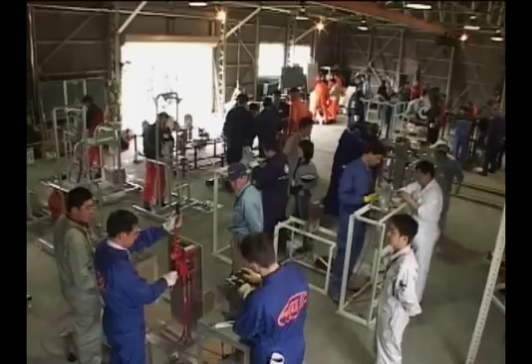Typical causes of accidents include improper resetting of the lifeboat release device, inadvertent operation of the release handle, and cable rod malfunction. Following a spate of incidents, the SOLAS Convention was revised, and as of July 2006, annual inspections, servicing and repair are to be conducted by the manufacturer's representative or a person trained and certified by the manufacturer.

In this DVD program, you will be shown operation and maintenance fundamentals for various types of life-saving appliances, with a focus on accident prevention. The guidelines introduced are general in nature. For a specific model or product, users are strongly advised to refer to the instruction manual provided by each manufacturer.

Standards, specifications and functions applying to lifeboats are strictly regulated by the SOLAS Convention. Lifeboats covered by the 83 amendments include partially enclosed lifeboats, totally enclosed lifeboats, and totally enclosed fire-protected lifeboats that are equipped with water spray systems and air supply devices.

Most lifeboats used on modern general merchant ships are of a totally enclosed design, i.e. they are covered with a canopy and have a propulsion engine. As for passenger ships, partially enclosed lifeboats are the most common. Ships with highly flammable cargo or handling toxic materials carry fire-protected lifeboats.

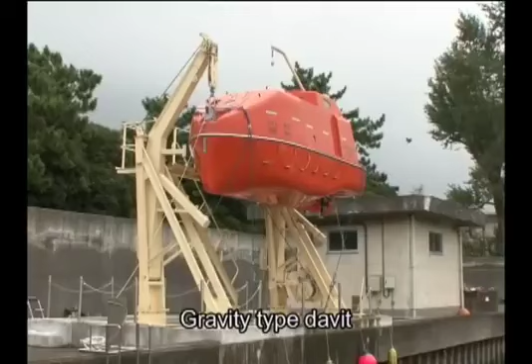All lifeboats have both offload and onload release functions, and simultaneous release of both ends is possible. Following enforcement of the 1996 amendment to the LSA code, all lifeboats are provided with an interlock mechanism to prevent accidental release before the lifeboat is waterborne. Totally enclosed lifeboats are usually launched using gravity-type davits. However, all bulk carriers built after July 2006 are required to have free-fall launching devices.

To provide you with a better understanding of the structure and operations of various kinds of life-saving equipment, on this DVD we will deal with lifeboats, life rafts, rescue boats, life jackets, immersion suits, distress signals, and other accessories.

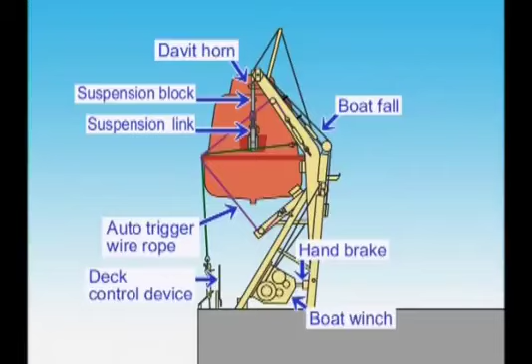Gravity-type davits swing a lifeboat outward and lower it into the water. They consist mainly of a pair of frames, davit arms, a lashing device, boat falls, suspension blocks, and boat winches. The lifeboat is lowered at a constant speed, using its own weight, by operating either the remote control wire inside the lifeboat or the remote control lever on the ship's deck.

Let us take a closer look at lowering and launching operations for totally enclosed lifeboats with gravity-type davits. Prepare a set of transceivers and confirm that communication is possible. Also confirm that the cable for the storage battery charge has been detached. Confirm attachment of the painter to the lifeboat's painter release device. The painter should be connected to the bitt of the parent ship as far forward as practicable.

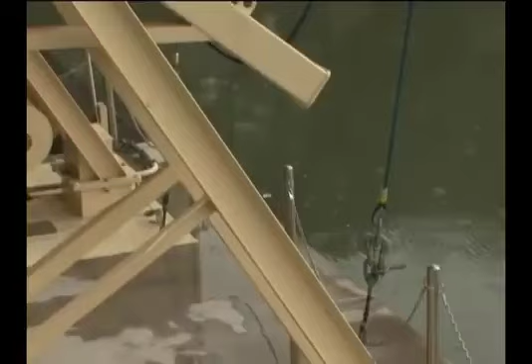Remove the overlashing wire ropes if fitted. Some vessels are not equipped with overlashing wire ropes. Overlashing wire ropes, once removed, should be kept together, but far enough away to prevent entanglement with the lifeboat. Tangling of the rope with the lifeboat could lead to a serious accident. The auto-trigger wire rope comes off automatically when the lifeboat is swung out.

Pull out the safety pin to release the boat winch brake. Pull out the davit arm stop safety pins, both fore and aft, and release the stop by pulling down the handle in one continuous motion. Confirm that the remote control wire has been drawn into the lifeboat. Then open the access hatch and get on board.

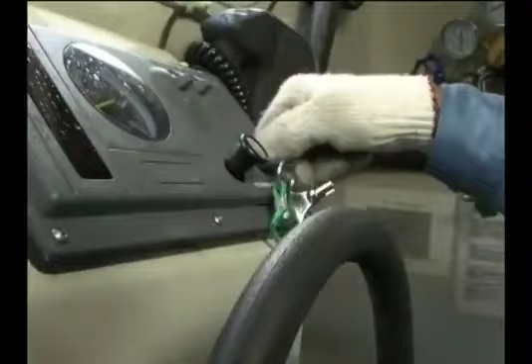Once inside the lifeboat, immediately fit the bottom plug. Open the fuel valve and the cooling seawater valve, and close the drain valve on the exhaust pipe. Then confirm that all crew on board have fastened their seatbelts. The operator starts the engine and pulls down on the remote control wire to swing out the lifeboat.

Once swing out is complete, fully pull down the remote control wire. The lifeboat will descend at a fixed speed using its own weight. As the lifeboat approaches the water's surface, the operator should alert the crew about impending splashdown. Avoid rapid swing-outs or abrupt halts during the swing-out operation, as this can have a dangerous impact on the boat. Inching operation is also dangerous, since it shakes the lifeboat.

Lifeboat swing-out and lowering operation can also be conducted using the operation lever on the deck of the parent ship. There are two types of release for launching a lifeboat. One is the offload release, the standard method of launch and release, and the other is the onload release, which is to be conducted in emergency situations only. When the lifeboat is fully waterborne and there is no load on the release hook, carry out offload release. When the lifeboat is not fully waterborne and there is a load on the hook, onload release shall be performed.

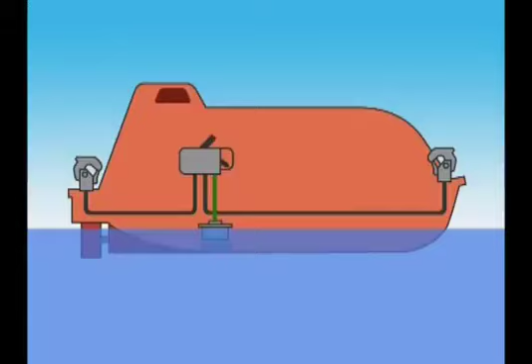The release gear system comprises a pair of release hooks located fore and aft of the boat, a release handle on the side of the steering seat, a pair of control cables, a hydrostatic unit to prevent the lifeboat from plunging due to mishandling, and an interlock cable.

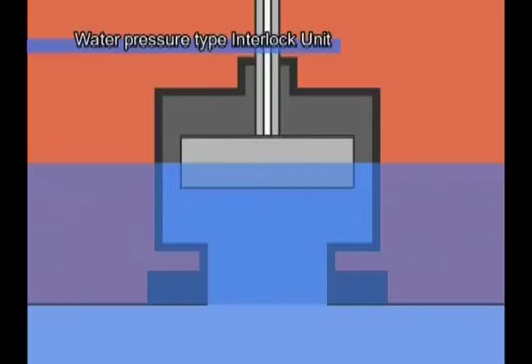There are two types of hydrostatic unit: a direct system that controls detected water pressure directly through an interlock cable, and an electric type that electrically controls the interlock lever with pressure signals to operate the relay and the solenoid. The interlock mechanism, which prevents a mishandled lifeboat from falling before it is fully waterborne, became mandatory for all lifeboats under the SOLAS 96 amendment.

The offload release is an operation conducted when the lifeboat is fully waterborne and there is no load on the release hook. Prior to conducting this operation, the following should be confirmed. No ropes or lines are entangled on the fore and aft release hooks. The lifeboat is fully waterborne. The engine has been started. And finally, all crew are in their seats with their seat belts fastened.

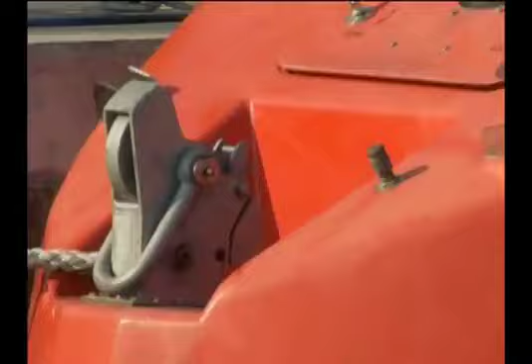After all this has been confirmed, the operator releases the safety lock device, pulls out the release handle safety pin, and pulls the release handle to the fully open position in one continuous action. Some release gear systems do not have a safety lock device. In normal situations, the interlock unit detects the water pressure and releases the interlock when the boat is afloat, so it is possible to carry out an offload release using the release handle. However, in the event that the hooks have not released, it is necessary to conduct an onload release.

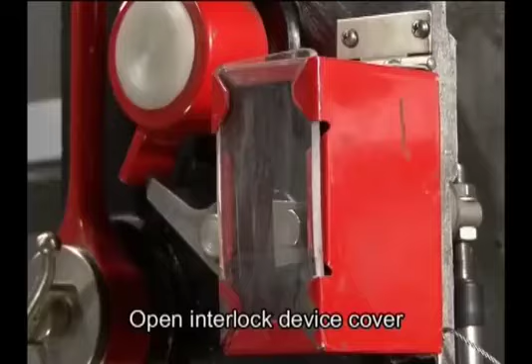The onload release should be reserved for emergency use only, when the hooks are not released due to malfunction of the hydrostatic unit, or when seas are rough and normal offload release is not advisable. To conduct an onload release, first open the cover of the interlock device. Fully raise the hydrostatic interlock lever and while holding it, insert the securing pin to release the interlock.

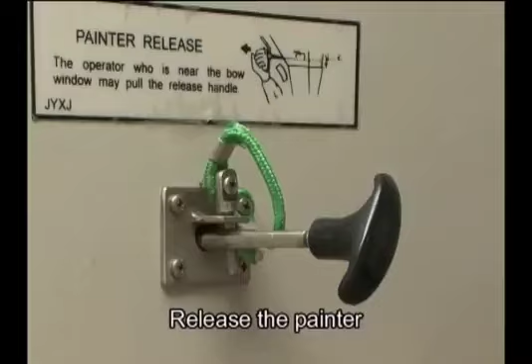Then, release the safety lock device. Next, remove the release handle safety pin and pull the release handle to the fully open position in one continuous action. Some release gear systems do not have a safety lock device. Release the painter and immediately get clear of the ship.

Now let's look at the recovery operation. At least 3 persons are required for this operation. Accidents involving lifeboats often take place during recovery. Of these accidents, 70% are due to improper resetting of the release gear. As such, mastering the proper way to reset the release gear is extremely important. Properly resetting the release hook is an essential part of every recovery operation. Improper resetting may lead to the lifeboat being held by only one hook or even falling, resulting in a fatal accident.

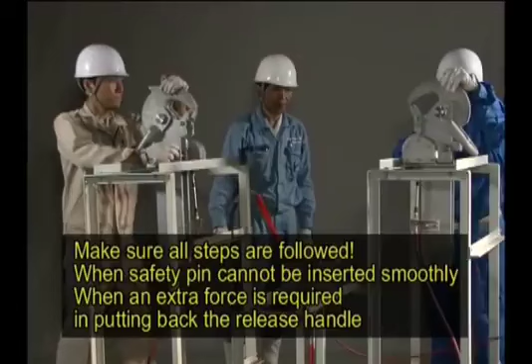There are various types of release hooks. Regardless of type, improper resetting is indicated when the safety pin cannot be smoothly inserted or when extra force is required to return the release handle to the set position. If you have any doubts about the resetting operation, start over and redo each step in the process.

To reset the release hooks, begin by pulling the release handle upward for about 30 degrees. Next, simultaneously lift the fore and aft hooks. After ensuring that the hooks have been reset properly, insert the safety pin. Finally, reset the safety lock device and make sure that it is in the locked position. The safety pin cannot be inserted unless the release handle is in its locked position.

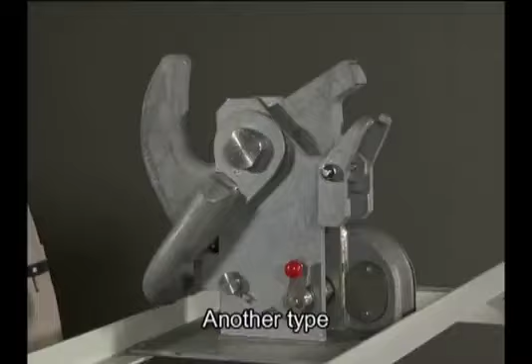The reset procedure is the same no matter which type of release hook you are dealing with. Lift up both the fore and aft hooks and swing down the release hook reset levers. The release handle is automatically reset. Confirm that the release handle is fully reset and insert the safety pin. Next, insert the winch handbrake safety pin.

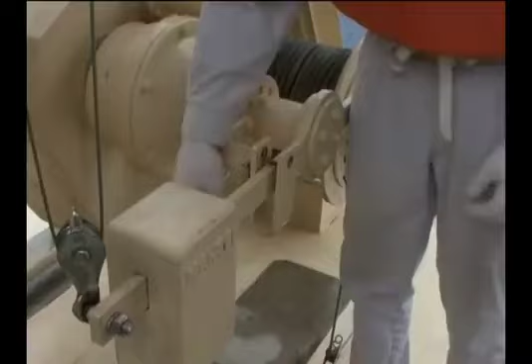Maneuver the lifeboat until it is under the boat falls. Using the winch, adjust the suspension links to the proper height. Simultaneously connect the suspension links to both the fore and aft hooks. Operate the winch using a remote controller and begin hoisting. Stop hoisting the lifeboat when it is just clear of the water, and confirm that the fore and aft hooks are properly connected. Also confirm that the hydrostatic interlock lever has been moved back to the locked position.

Resume hoisting. When the davit arm approaches the stowed position, the davit arm strikes the limit switch and the boat winch stops automatically. Only after it has been confirmed that the winch has stopped completely may the crew disembark the lifeboat. Place 2 persons on the davit platform to oversee proper stowage.

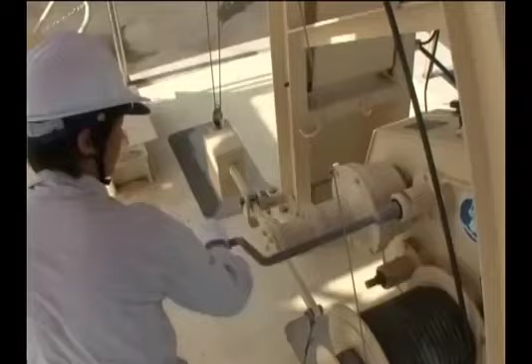When the winch stops automatically, manually hoist the davit arm. Confirm that the davit arm is in contact with the platform stop and cease winding. Beware of overwinding. Do not forget to detach the manual hoisting handle once winding has been completed.

Immediately reset the davit arm stop and insert the safety pin in the davit arm stop handle. After removing the handbrake safety pin, lower the suspension blocks on the davit horn by releasing the handbrake.

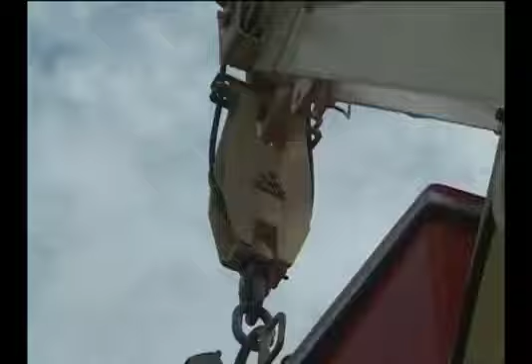If the suspension blocks are not on the davit horn, the boat falls will remain under tension and may be damaged.

Insert the handbrake safety pin. Be sure to turn the end of the safety pin.

Install the auto-trigger wire rope and use turnbuckles to tighten it.

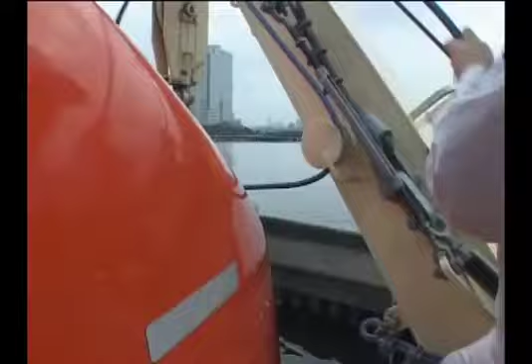Install and tighten the overlashing wire rope.

The painter should be kept attached to the painter release hook at all times.

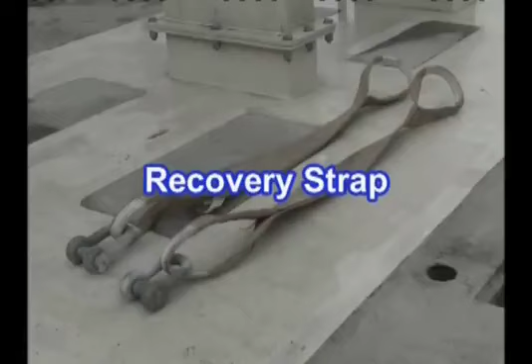When using recovery straps in rough seas, connect the recovery strap between the release hook and suspension links.

Once the lifeboat is out of the water, connect the maintenance wire to the release hook.

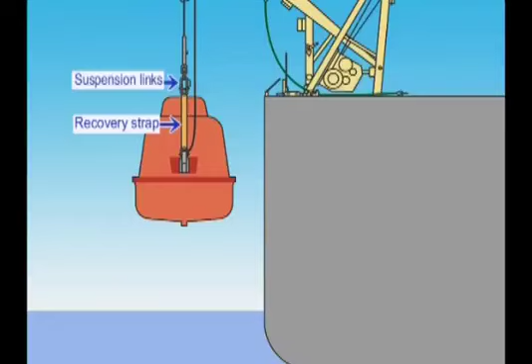Shift the boat's weight onto the maintenance wire. Remove the recovery straps and attach the suspension links to the hooks and execute the lifeboat recovery operation.

Fire-protected lifeboats are totally enclosed lifeboats with water spray and air supply systems and are carried on ships such as tankers.

The water spray system on fire-protected lifeboats effectively cools the surface of the boat envelope in order to protect the hull surface from fire damage and the cabin from high temperatures, thereby enabling the lifeboat and the crew to evacuate to a safe sea area if fire breaks out near the parent ship following an accident.

The system protects the lifeboat and crew for at least 8 minutes.

The spray system pumps seawater with a spray pump, ejecting it from nozzles on the external surface of the boat, cooling the hull.

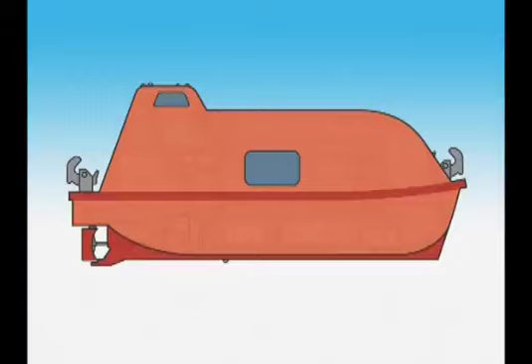The air supply system protects the crew when they encounter a fire on the sea or are in an environment filled with toxic gas. In escaping from a hazardous area, all lifeboat openings are closed.

The system provides clean air sufficient to operate the main engine and sustain the crew for not less than 10 minutes.

Containers of highly compressed air found inside the lifeboat supply air to the lifeboat via a pressure regulator.

During use, the valves on every compressed air container and the pressure check stop valve have to be opened.

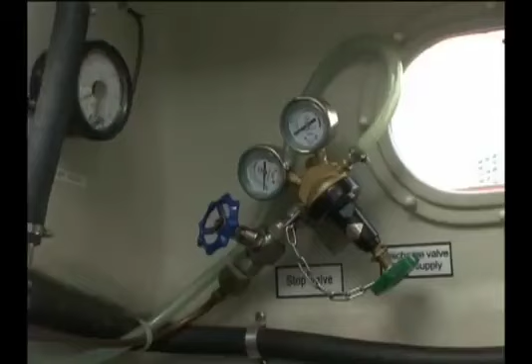Confirm that pressure for air containers is maintained at the primary pressure gauge level indicated on the high pressure side of the air regulator.

While observing the secondary pressure gauge level on the low pressure side of the air regulator, adjust the pressure using the regulator's handle so that the in-boat differential pressure indicator shows a pressure slightly higher than the external air pressure. Check that the air is being discharged.

Now let's look at the free-fall lifeboat system.

All bulk carriers of 20,000 gross tonnage and upwards built on or after July 1, 2006 are required to have a free-fall lifeboat.

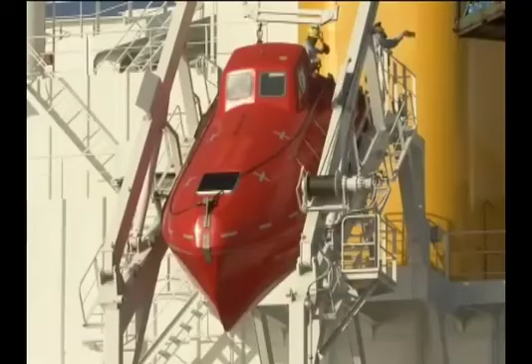Free-fall lifeboats are placed at the ship's stern. In the event of an emergency, the crew board the lifeboat in its stowed position and then conduct a free-fall launch. The launching operation can be performed from inside the lifeboat.

The davit unit of a free-fall lifeboat consists mainly of a slide track, a davit arm, a pair of suspensions, a hydraulic cylinder, and a lashing device.

The winch is composed of a wire drum, a hydraulic motor, speed reduction gear, and hydraulic brake gear.

Prior to launch, make sure that the water surface is free of obstacles.

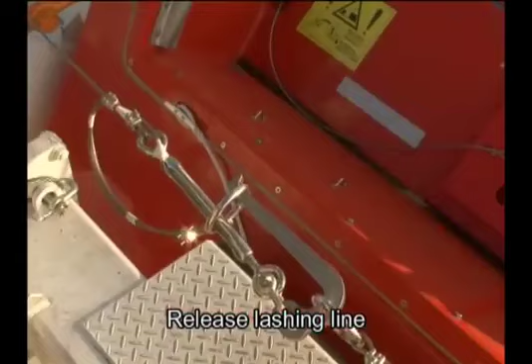Next, release the lashing line and confirm that the lashing plate has been released. The lashing plate will be released automatically once the lashing line is released.

If the lashing plate is not released, release it manually using the attached nylon rope.

Next, check that the battery charge cable has been detached.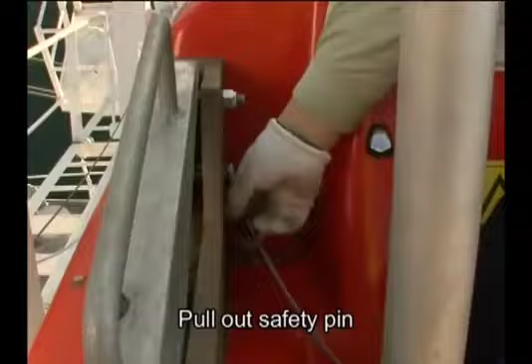Then remove the release hook safety pin and open the rear hatch.

The coxswain should confirm that all necessary launch preparations have been completed. The crew should then board the lifeboat from the rear hatch.

Finally, the coxswain boards the lifeboat and closes the hatch tightly from inside.

After everyone is on board, confirm that the boat's drain valve has been closed.

All crew members should be seated, should fasten their seat belts, and should grasp the handrail on the seat in front of them. Do not forget to use the headrest belt if it is available.

The operator should conduct a final check to confirm that all crew members have fastened their seat belts and that they have not put on life jackets.

Then the operator may be seated and fasten his or her seat belt. When doing so, please avoid touching the release lever.

The operator starts the engine.

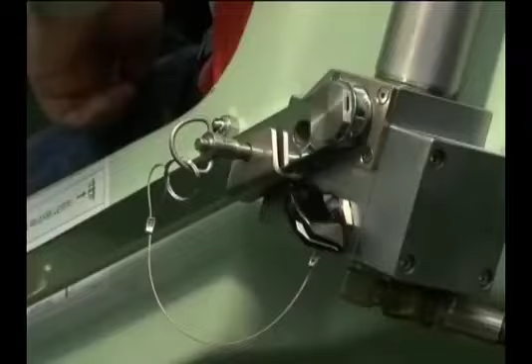Removes the release lever securing pin and closes the bypass valve. Pumping the release lever several times releases the main lashing, allowing the lifeboat to achieve free-fall launch.

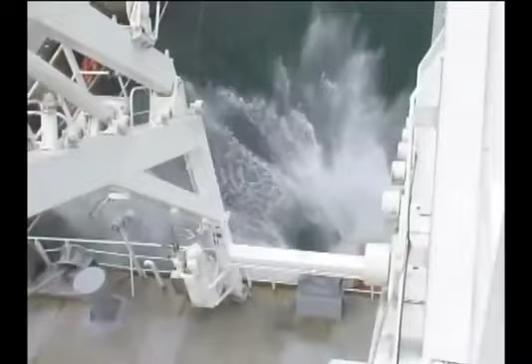Once the launch has been completed, immediately leave the parent ship for a safer area. Never use a painter during a free-fall launch.

In the event the hydraulic system does not function properly and emergency release is required, confirm that the bypass valve is open. Break the acrylic cover. Insert the emergency release handle and turn the emergency release bolt clockwise until it comes to a stop. The stopper of the main lashing will open and the lifeboat will be launched.

When a free fall is not possible due to insufficient water depth, or when the ship is in an inappropriate area for a free fall, it is possible to lower and launch the lifeboat using davit arms.

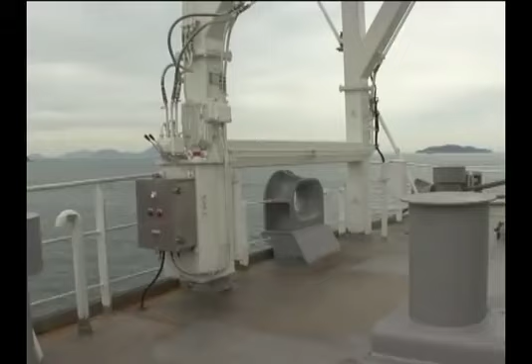When launch preparations have been completed and confirmed, switch on the hydraulic power pack. Operate the control lever to lower the traverse, and subsequently remove the hook lashing lines. Attach the wire ropes to the suspension.

Using the lever, position the davit arms just above the boat lifting position and adjust the fore and aft balance of the lifeboat.

The crew members embark the lifeboat from the rear hatch, take their seats and fasten their seat belts. Each member should grasp the handrail on the seat in front of them. The operator then boards the lifeboat and closes the hatch.

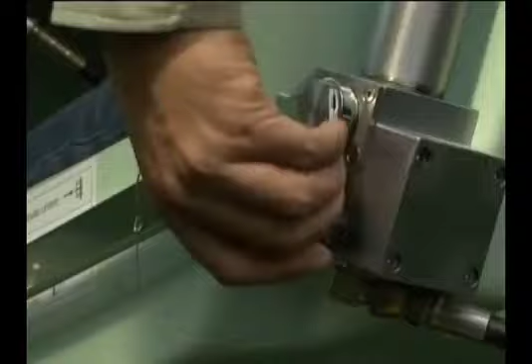The operator confirms that all crew members have fastened their seat belts and then removes the pin securing the release lever and closes the bypass valve. Pumping the lever several times releases the release hook and removes the main lashing.

After visually confirming that the main lashing has been released, the operator on the main ship shall use the control lever to swing the davit arms to the proper lowering position and then lower the lifeboat.

When the boat is waterborne and has become well balanced, the operator on board the lifeboat shall indicate to the operator on the parent ship to stop lowering the boat.

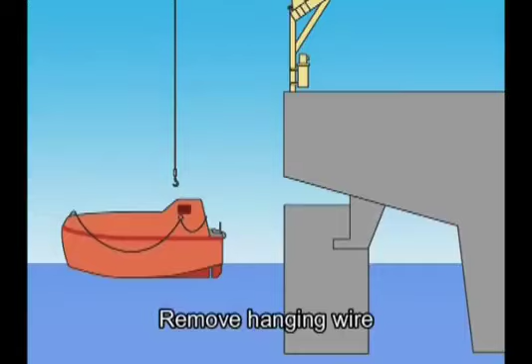The operator on board shall remove the wire ropes used to suspend the boat and attach them to the plate provided. The boat engine can now be started. Immediately leave the area of the main ship.

Switch on the hydraulic power pack on the parent ship. The operator on deck uses the control lever to swing out the davit arms. Next, lower the suspensions to a height allowing the wire ropes for hanging the boat to be attached. These steps should be carried out under instruction from an operator on board the lifeboat.

The operator on board the lifeboat attaches the wire ropes to the suspensions. After signalling to the operator on deck, the operator on board the lifeboat should be seated with seatbelt fastened and should stop the engine.

The operator on deck confirms that the engine has been stopped and starts hoisting the boat. The movement of the traverse should be halted prior to coming into contact with the hinge block and the wire rope support. By operating the control lever, stow the davit arm to the boat set position.

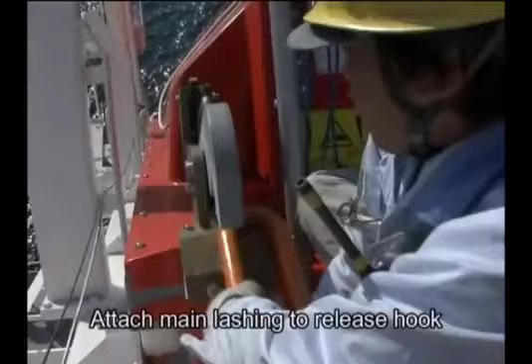Securely attach the main lashing to the release hook. After confirming that the main lashing is secure, the crew may disembark the lifeboat via the rear hatch.

The operator on deck lowers the suspensions, detaches the wire ropes for hanging the boat, and attaches them to the plate provided.

Using the control lever, move the davit arms to the stowing position. Although the davit arm stops moving when it comes into contact with the arm support, keep an eye on the davit arm during this operation.

Attach the hook lashing lines to the suspensions. Set the lashing line. The lashing plate is set automatically once the lashing lines are attached. Turn off the power pack.

The SOLAS Convention requires that all vessels equipped with free-fall lifeboats also carry rescue boats. There are three types of rescue boats: rigid, combined, and inflated, and all three have propulsion systems.

Rescue boats on bulk carriers can be operated continuously for 4 hours at a speed of 6 knots. Rescue boats must have capacity for at least 5 seated people, plus room for 1 person lying on a stretcher.

The crew put on anti-exposure suits. To maintain effective insulation against the elements, every part of the body, including the face, must be covered completely.

Let's take a look at rescue boat davits. Launching operations using the davit can be performed both inside the rescue boat and on deck.

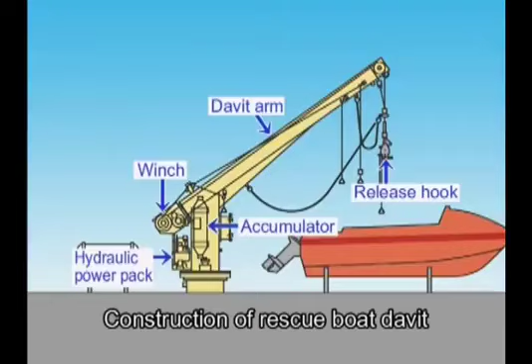For any vessel carrying a free-fall lifeboat, rescue boat davits can also be used as life raft davits.

The winch unit is composed of a wire drum, electric motor, speed reduction device, handbrake device, and a governor brake device.

Lowering and launching of the rescue boat is possible by operating the slewing remote control wire, the inboard remote control wire, deck remote control wire, and the handbrake device, which allows the lifeboat to descend at a fixed speed under its own weight.

The rescue boat's automatic release hook is composed mainly of a hook reset lever, a release lever, an automatic release wire, and an on-load release wire.

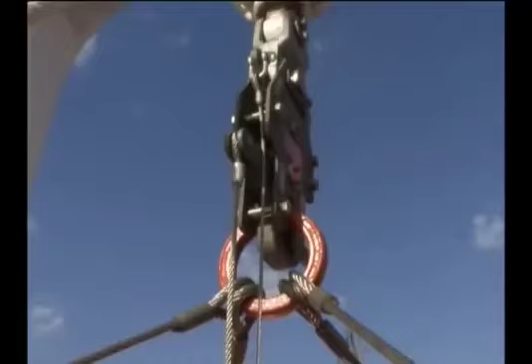Confirm that the slewing remote control wire and the inboard remote control wire have been drawn into the boat. Confirm that the boat hanging wire is attached to the release hook and that the painter is set to the painter releasing device, which is located at the bow of the rescue boat.

Remove the lashing wire rope. Remove the safety pin from the handbrake device on the winch. Board the crew. The operator on deck uses the hoisting switch to raise the boat free of its stand.

During hoisting, swing out, launching and release of the rescue boat, the operator on deck shall stabilize the boat using the painter. The crew on board the rescue boat pull the slewing remote control wire and slew the davit to the lowering position.

Slewing stops when the operator's hand is removed from the slewing remote control wire. Prior to slewing and lowering of the rescue boat, ensure that the tricing line has not become entangled with the boat.

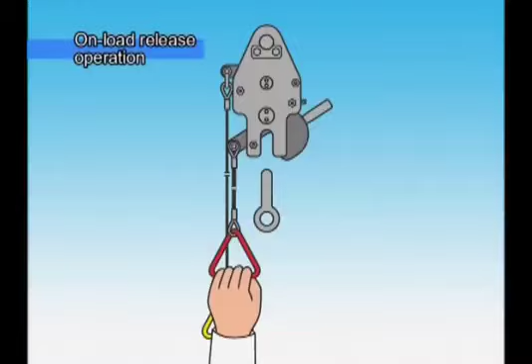As in the case of automatic release operations, on-load release is carried out by pulling the automatic release wire into the set position for automatic release mode, pulling the on-load release wire, and releasing the hook.

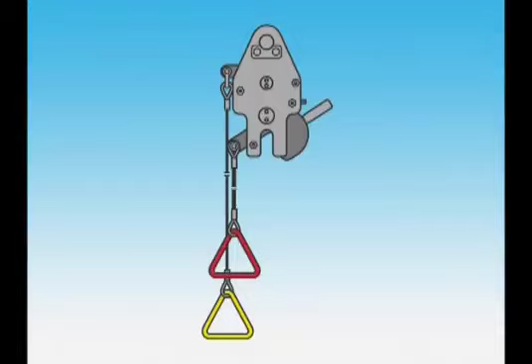Insert the safety pin and lock the winch handbrake device. Attach the shackle of the boat hanging wire to the hook in the released position. Pull down the hook reset lever to reset. The release lever will be reset automatically in the locked position.

Use the hoisting switch to raise the boat. Visually observe the operation until hoisting is stopped automatically by the limit switch.

The operator should confirm that the boat slewing area is free of obstacles and then slew the davit to the stowed position, set the boat on the stand, and set the boat's lashing line.

Check the accumulator pressure gauge and, if necessary, recharge it to the specified pressure level. When the operation has been completed, close the accumulator valve.

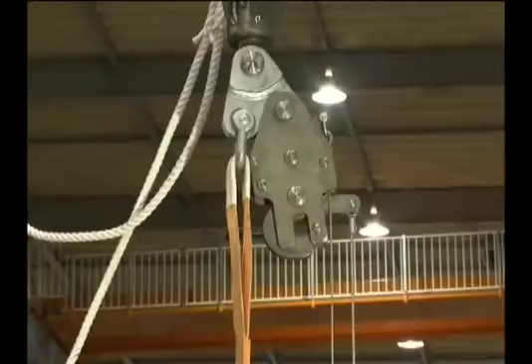For recovery of a rescue boat in bad weather, use the recovery strap. When launching a rescue boat in bad weather, mount the recovery strap to the joint plate in advance. Also, prepare the hanging off pendant.

Launch the rescue boat by following the standard rescue boat launching procedures. Remember, do not use the recovery strap for launching operations.

When hoisting the rescue boat, attach the recovery strap to the boat link. Hoist the boat to a position where the hanging off pendant can be set and then set the hanging off pendant.

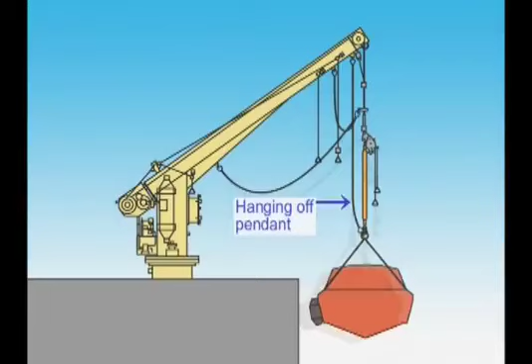Slew the davit into a position where the boat can be pulled toward the ship and have the crew embark on the ship. Lower the boat until its full weight is borne by the hanging off pendant and remove the recovery strap.

Set the release hook to the boat link. Hoist the boat until its full weight is borne by the release hook and remove the hanging off pendant. Slew the davit and store the boat.

Various types of life rafts are currently in use, but we will focus our discussion mainly on life rafts that conform with the SOLAS 96 amendment.

Made of synthetic fibre with synthetic rubber or polyurethane, life rafts are kept airtight and watertight. Featuring good stability and habitability, they have a structure that withstands harsh environments.

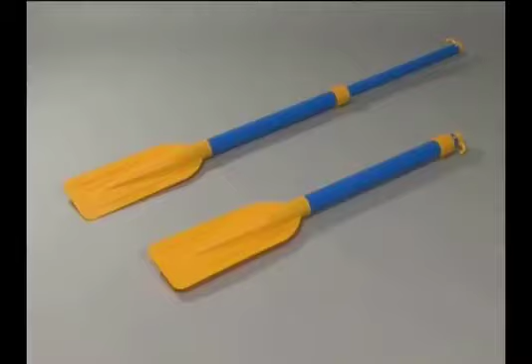These items have specific applications for specific contingencies. Some are to be used at an early stage during launching and initial drifting. Some are employed to maintain the crew's physical strength while adrift, while others are used to maintain the life raft's performance. Still others are for transmitting distress signals.

All life rafts conforming with SOLAS 96 have instruction stickers on the surfaces of their containers.

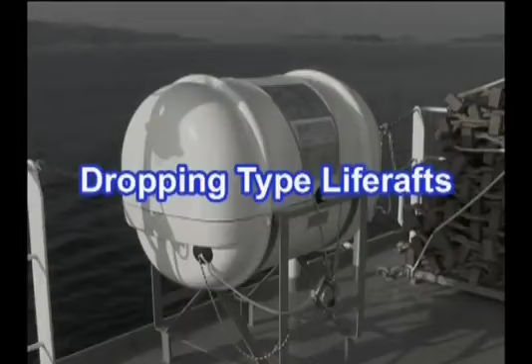One of the most commonly used life rafts is the dropping type, which is stowed on deck. The life raft container is placed on a cradle and is secured by a lashing wire with an automatic release device.

Life rafts conforming to SOLAS 96 are of the weak link type, and the painter is attached to the painter connecting ring. An automatic wire and an operating wire are located at the painter's midpoint. The operating wire is connected to the painter inside the container.

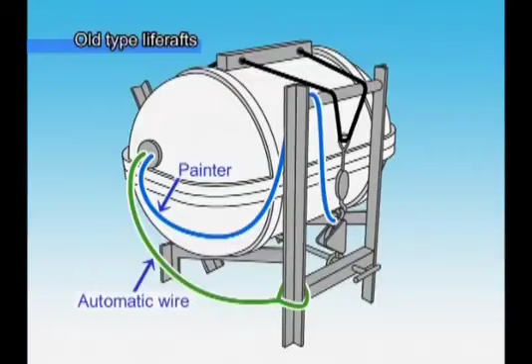Some older types of life raft have a separate automatic wire or wires and painters and do not have a weak link.

Manual dropping of a life raft is possible by pulling the release handle built into the cradle. The automatic release device has an automatic operating mechanism that is triggered by water pressure; it cannot be operated manually.

Some older types of life raft feature an automatic release device with a manual dropping handle.

A cradle with a weak link has one end of the weak link connected to the cradle and the other end either to the painter connecting ring or directly to the painter.

When a ship sinks, tension is applied to the weak link and the link disconnects, separating the life raft from the ship.

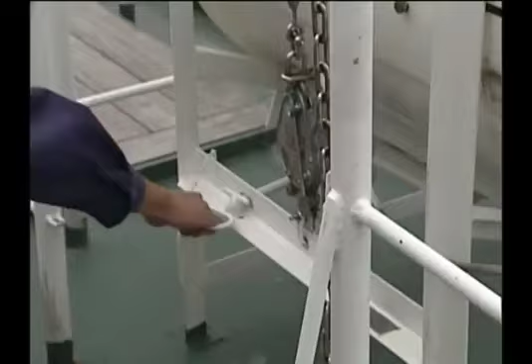In an emergency situation, it is possible to manually initiate a gravity fall of the container along the inclined cradle. In this case, the operating wire is pulled and the inflation of the life raft is triggered, opening the container and allowing the life raft to inflate automatically.

Some units allow inflation and discharge of the life raft by pulling the painter manually after dropping the life raft container. When the life raft is dropped manually, the ship and the life raft are moored to the painter, and no tension is applied to the weak link. As such, it is necessary to cut the painter after embarkation.

Should the ship sink before the life raft can be dropped manually, hydrostatic release equipment will be activated at a water depth of between 2 and 4 meters.

The container's buoyancy causes the automatic wire to be pulled, inflating and discharging the life raft. At the time of inflation, the painter is disconnected from the ship upon activation of the hydrostatic release equipment. The weak link is broken after the life raft is inflated.

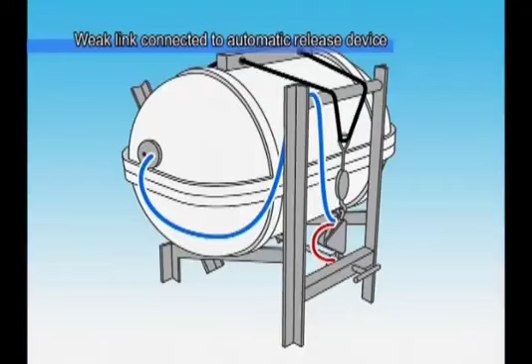The painter and one end of the weak link are directly connected to the painter connecting ring on the hydrostatic release equipment, while the other end of the weak link is secured to the ship. The operating wire is connected to the painter inside the container.

The painter is directly connected to the painter connecting ring on the hydrostatic release equipment, and the weak link connected at the midpoint on the painter is secured to the cradle. The operating wire is connected to the automatic wire inside the container.

The painter is directly connected to the painter connecting ring of the hydrostatic release equipment. The automatic wire is also directly but independently connected to the cradle.

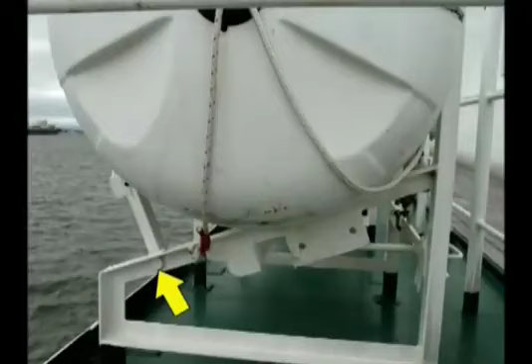All of the following must be checked prior to drop launch of the life raft. Confirm that the life raft container is not lashed with a rope or other bond. Check that there is no paint obstructing the cradle's auxiliary rail rotating pin. Ensure that the painter is connected to the hydrostatic release equipment. Check and confirm the connection of the weak link. Make sure that the safety pin is attached to the cradle's release handle.

When boarding the life raft from the ship, use a ladder or boarding ramp. When climbing aboard from the water, use the boarding ramp or a ladder attached to the raft. It is also possible to jump from a height of not more than 4.5 meters onto the canopy. Pay attention to crew already in the raft.

Do not board with tools, cutlery, or other objects that could damage the life raft. If the life raft should inflate in an inverted position, climb on the CO2 gas cylinder while taking hold of the righting rein on the bottom and apply your weight to turn it over to its normal position.

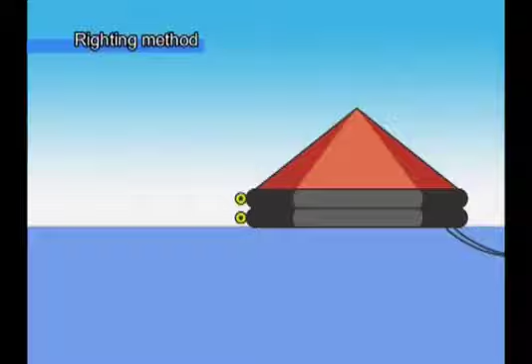After boarding the raft is completed, remove the knife kept outside the canopy and cut the painter in such a way as to leave about 5 meters of it attached to the life raft. After separating the painter, recover the sea anchor that is tied near the external CO2 cylinder to avoid being caught in the whirlpool caused by sinking of the parent ship.

Remove the paddles from the accessory bag, stick them out of the 2 openings in the boarding ramps, and row the raft according to instructions provided. Maintain sufficient distance from the ship to avoid being caught in the whirlpool. Only now should the sea anchor be redeployed.

As an auxiliary measure, it is possible to move the life raft by dropping the sea anchor into the water and then pulling the life raft towards it. Initial procedures after boarding the life raft are described in the manual Instructions for Immediate Action, and it is strongly advised that these directions are followed.

If the container is connected to the life raft and is floating, use a knife to sever the connection. Retro-reflecting tape, which makes a search from both sea and air easier, is attached to the surface of the life raft.

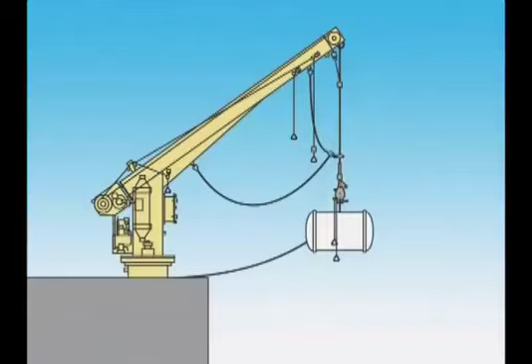Now let's see how to launch a life raft using the davit launching method. Under the davit launching method, the container of the life raft is lifted by the davit, and the davit is turned to the life raft lowering position. By pulling the automatic wire, the life raft inflates, and the crew embark while the life raft is suspended above the deck. Using the davit, the life raft is then lowered, splashes down, and is released.

The biggest advantage of the davit launching method is that it makes it possible for the crew to evacuate the parent ship without getting wet. In normal situations, the life raft container is stored on the deck cradle. The davit-assisted launch procedure for a life raft is the same as that for a rescue boat. Lowering and launching are possible with the operation of a winch remote control.

Ships are often equipped with supplementary carry-and-drop type life rafts when standard lifeboats or life rafts are installed at distances from the bow or the stern of more than 100 meters. Automatic release devices are not required for carry-and-drop type life rafts.

Some carry-and-drop type life rafts are equipped with an automatic release device, but they are used in the same manner as life rafts without an automatic release device. The life raft is carried to the dropping position where the painter is secured to the ship and the life raft is dropped.

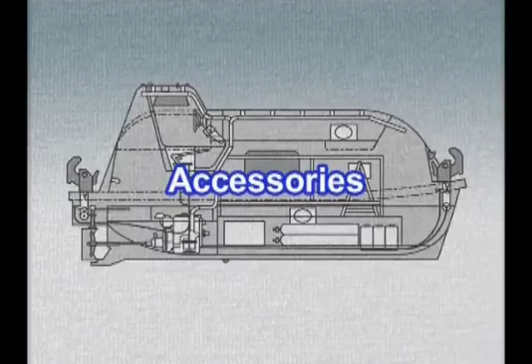Now let's look at accessories for lifeboats and life rafts. The accessories are generally the same, though the contents may differ slightly depending on the capacity of the lifeboats and life rafts.

Accessories common to lifeboats and life rafts: rescue quoits, sea anchor, bailer, food rations, fresh water, drinking vessel, first aid outfit, anti-seasickness medicine, seasickness bags, thermal protective aids, jackknife or safety knife, tin openers, whistle, fishing tackle, instructions for immediate action, survival manual, instructions for life-saving signals, rocket parachute flares, hand flares, buoyant smoke signals, waterproof electric torch, daylight signaling mirror, radar reflector, sea dye marker.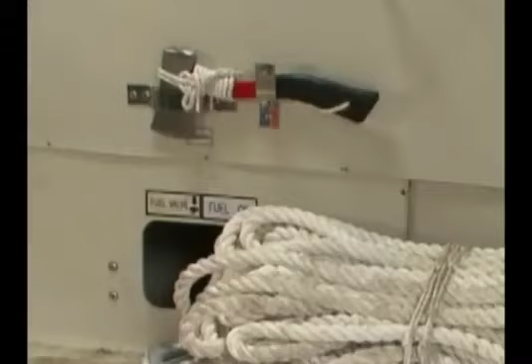Special accessories for lifeboats: buckets, dipper, hatchets, compass, painters, oars, thole pins and crutches, boat hooks, engine repair tools, portable fire extinguisher.

Special accessories for life rafts: paddles, safety scissors, sponges, repair outfit, topping up pump. Optional accessory: desalinator.

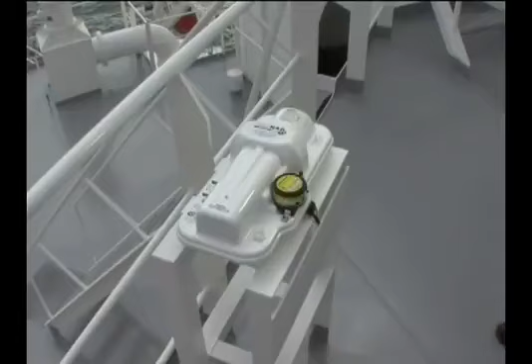The satellite EPIRB is activated when it is removed from the installed position in the parent ship, and transmission starts automatically. The name and position of the vessel in distress, etc., are sent to the Earth stations via satellite. Should the ship sink, the EPIRB floats by itself and automatically begins transmission.

The SART radio transponder is used for search and rescue of survivors via GMDSS, Global Maritime Distress and Safety System. It receives transmissions from radar units installed on search and rescue boats, aircraft, etc., and transmits response signals.

Visual signals are used as distress signals for vessels. A flash and a large amount of orange-colored smoke help identify the position of the vessel. Visual signals are required to have a useful life of 3 to 3.5 years and are stored in a special resin container.

Signals, especially those made of gunpowder, should not be pointed towards a person, should be used only during an emergency, should not be put back in their container once the pull ring has been pulled, and should be used only for sending distress signals.

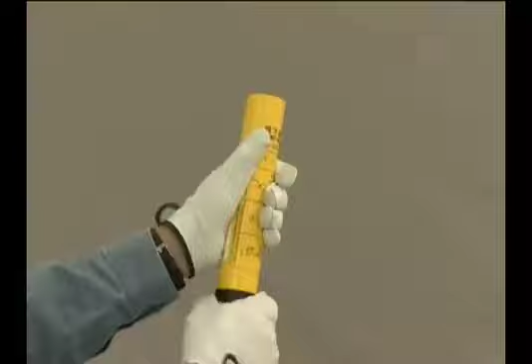Remove the caps on the top and bottom. Remove the safety pin, then lift the ignition lever. To launch, while holding the body of the signal vertically, press the ignition lever in the rocket body with your palm.

Hand flares indicate the position of lifeboats and life rafts. A red-colored flare of about 15,000 candelas is continuously produced for at least 1 minute. To ignite a hand flare, lift the grip and pull out the ignition cap. After ignition starts, hold it as far away from your body as possible, keeping it on the leeward side.

The floating body of a lifebuoy is made mainly of cork. Those used for rapid release gear weigh 4 kilograms or more, and those for other devices weigh approximately 2.5 kilograms.

Line-throwing appliances are capable of launching a line and reaching a distance of over 230 meters toward the distressed vessel. A set comprises 1 rocket-type launcher, 4 or more projectiles, and a line longer than 320 meters.

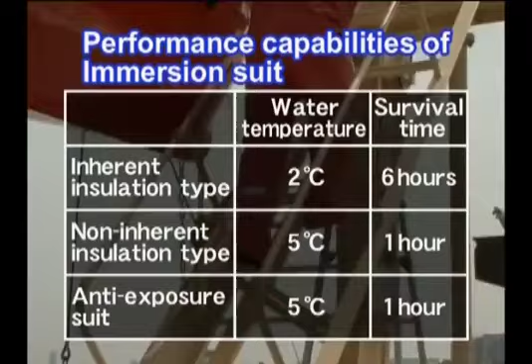For the anti-exposure suit, priority is given to improved user movability and operability. As a trade-off, the materials used are less waterproof and less capable of retaining body heat. It is possible to survive for 1 hour in water of 5 degrees Celsius.

It is required that life jackets can be donned without assistance within 1 minute, and they must also meet requirements for buoyancy and strength. They are designed to resist damage, and it is required that they will not be torn from the user's body even if the user jumps from a height of 4.5 meters. They will not injure the user either.

2 types of life jacket are available, rigid type and inflatable type. Rigid-type life jackets have a buoyant structure. After donning a rigid-type life jacket, the user secures it to the body with a cord or a buckle. Inflatable-type life jackets have 2 independent compartments that are inflated either manually or automatically.

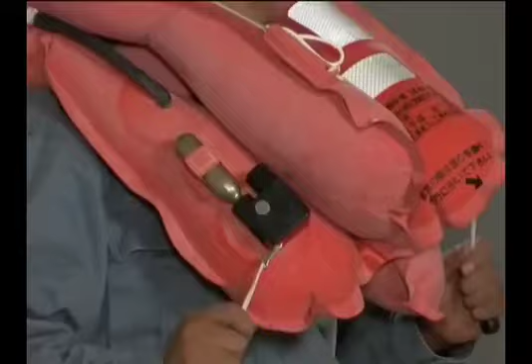Should inflation be insufficient, use the auxiliary air supply device, which can be inflated by mouth. Life jacket lights come with the life jacket and can be turned on manually. They remain lit for 8 hours or longer.

According to revised SOLAS, from 2010, all life jackets used on newly built vessels should be equipped with a buddy line to allow survivors to link themselves together and a lifting loop. Bandage-type life jackets will no longer be approved.

This section deals with inspection and maintenance of life-saving appliances to be carried out by the crew on board a ship. As from July 2006, annual inspections, servicing and repair of lifeboats shall be conducted by the manufacturer's representative or a person appropriately trained and certified by the manufacturer.

However, it is the responsibility of the crew on board to perform maintenance and inspection of life-saving appliances on the ship in order to ensure reliability of the equipment and to maintain effective operation. The crew shall carry out weekly and monthly inspections in accordance with the instructions for maintenance and inspection provided by manufacturers. Visual and operational inspections are required for the maintenance and inspection of lifeboats.

External visual checks should look for obvious damage, scratches, cracks, deformations and other abnormalities, and confirm that devices such as the release gear are properly reset. Operational inspections shall be carried out for the release gear, painter releasing device, steering system and rudder, propeller, and so on. It is also necessary to check that there is no water leakage from the steering gear and the stern tube.

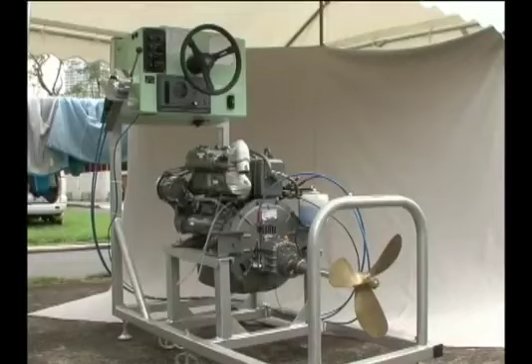Checkpoints for periodical maintenance work on engines include the following: engine start, clutch operation, amount of fuel oil, of lubricating oil and of cooling water, leakage of fuel oil, of lubricating oil and of cooling fresh water, inspection and maintenance of gauges. As for electrical equipment, conduct inspection and maintenance of lights, electrical wiring, which may be loose, battery fluid levels, and voltage.

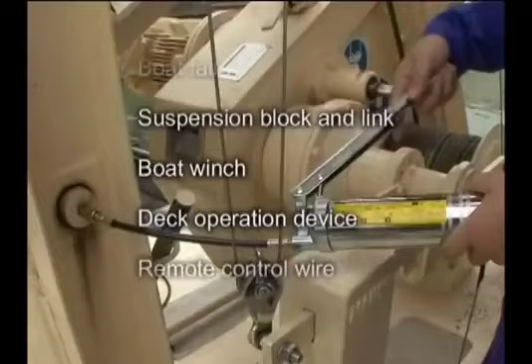Visually inspect all lifeboat davits for corrosion or rust, deformations, coating deterioration and cracks, and check the operational condition. Also, lubricate moving components so that they function smoothly in an emergency. Coat the surface of boat falls and other wires with oil.

During the inspection and maintenance of the boat winch, check the oil level of the gearbox and lubricate all moving components. Check the operational condition of the winch and the brake, and check that the winch is firmly fixed and that all wires have been wound correctly.

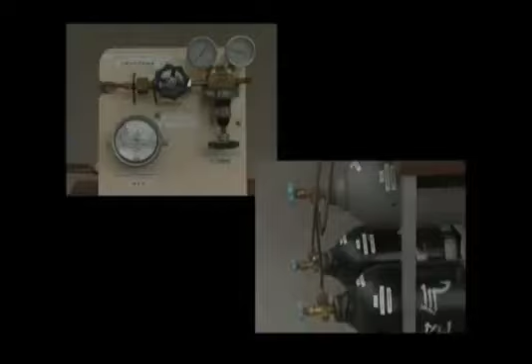Air supply devices for fire-protected lifeboats should be checked for corrosion of or leakage from the high-pressure pipe, and the volume of air in the compressed air container should be confirmed. The specified pressure is 17.7 to 19.6 megapascals.

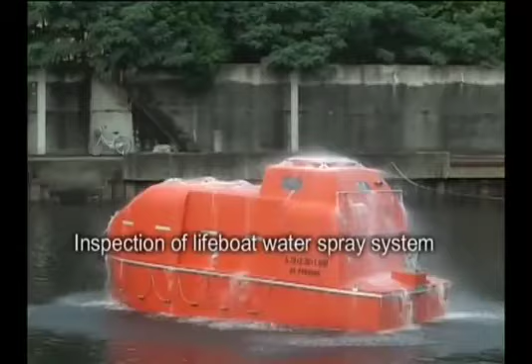Water supply devices for fire-protected lifeboats should be inspected to confirm a smooth opening and closing of the ship bottom valve and normal rising of spray pump pressure. In addition, check clutch operation and belt tension while looking for corrosion of the spray pipe and clogging of the spray nozzle. It is strongly advised that the spray pipe be cleaned with fresh water after every use.

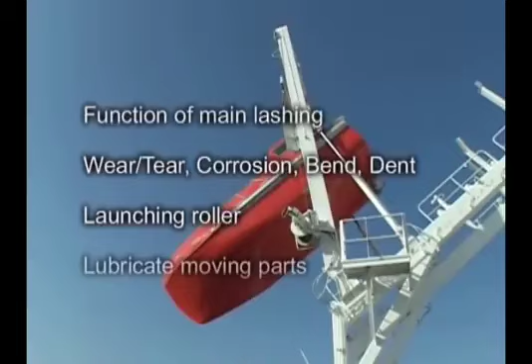Maintenance and inspection of free-fall lifeboats shall also be conducted in accordance with maintenance and inspection plans. Inspections of the release gear are of utmost significance, but attention should also be paid to equipment such as the launch device rollers. Moving components shall be periodically lubricated. Lubrication of the hydraulic cylinder is especially important. Additionally, confirm that the fixing part of the wire rope end is not loose and apply rope oil to the wire rope. Inspection of boat falls is important as well.

In performing maintenance and inspection of life rafts, the cradle and container are the main targets. In accordance with the Maintenance and Inspection Manual, inspect the outer surface of the container visually and confirm that it is securely installed on the cradle, that it is not lashed with other ropes or bands, and that the painter is connected to the connecting ring of the automatic release device.

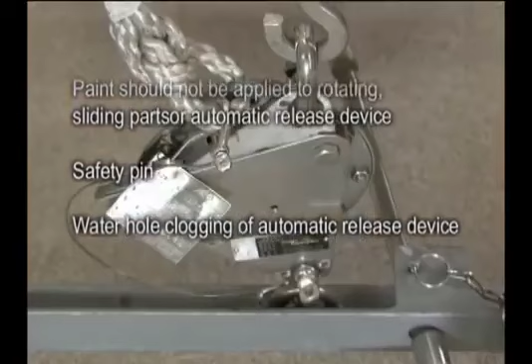Make sure that rotating parts, sliding parts, and automatic release devices are free of paint, and that the safety pins are securely inserted. In addition, confirm that the water drain on the automatic release device is not clogged with paint or dust. Annual maintenance is required by regulations for life rafts too. Life rafts that come up for inspection during periodical maintenance shall be inspected and maintained at a certified servicing station. In order to maintain good performance, routine maintenance and inspection is essential.

Proper knowledge of life-saving equipment, its handling and maintenance is essential if accidents are to be avoided during emergencies and live drills. Most accidents result from a lack of knowledge, improper handling, or improper maintenance. Therefore, effective education and repeated drilling in the use and care of life-saving equipment has become an issue of pressing concern. The purpose of this DVD is to prevent accidents caused by misuse of basic life-saving equipment. Equipment that is designed to save, not take your life.